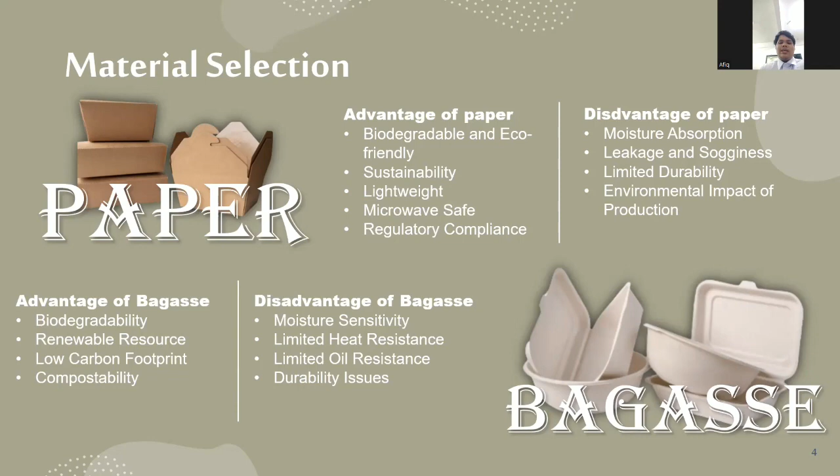Last but not least is durability issue. For sure, the bagasse container may not be as durable as some plastic or metal alternatives, especially in harsh conditions. They might break or deform more easily, potentially leading to spillage and food waste.

Next is about cornstarch. You know, cornstarch is from the corn. Cornstarch has its own advantages too. First thing first, why we choose cornstarch as our material selection is, same like bagasse, cornstarch has its own biodegradability.

Cornstarch containers are biodegradable, making them a more environmentally friendly option compared to traditional plastic containers.

Second, renewable resource. Cornstarch is derived from corn, like I said, which is a renewable resource contributing to sustainability.

Next, cornstarch is non-toxic. Cornstarch is generally considered non-toxic, providing a safer option for food packaging.

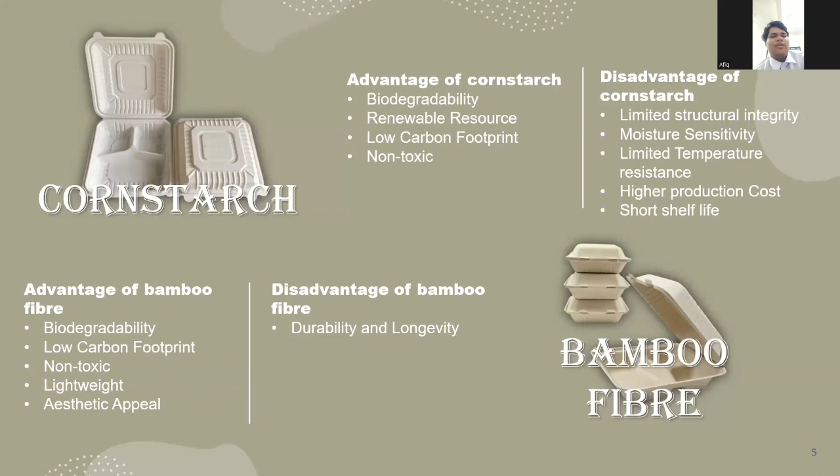Disadvantage of bamboo fiber is durability and longevity. Bamboo fiber does not have higher durability like cornstarch or like paper. Next, last but not least, aluminium.

Aluminium has many advantages in our material selection. First thing first is lightweight, very lightweight, so it can be brought anywhere with low weight. Second is durable and sturdy.

For your information, aluminum is very durable, so you can use it for a certain time when bringing the aluminum container.

Heat conductivity. For sure, many people like to heat their food, right? So they can put it into the microwave. So conductivity of heat means food can easily be heated.

Corrosion resistant, recyclability. This is very very important when you want to select a material. Because if you can recycle, why wouldn't you choose aluminum? Aluminum is very recyclable.

Next is versatile design property. For sure, many companies use aluminum as their food container, so many companies have versatile designs and cost effective production.

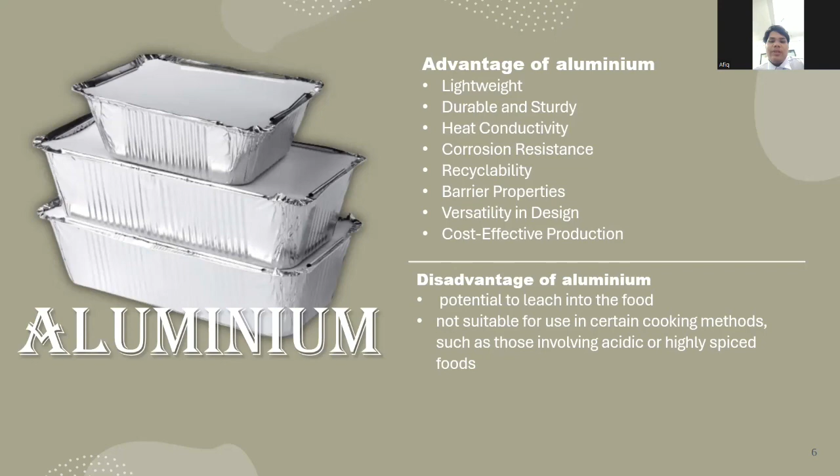Disadvantage of aluminum: potential to leach into the food, not suitable for use in certain cooking methods, such as involving acidic or highly spiced food.

There are five materials for processing and manufacturing. The first one is paper. The primary raw material of paper is wood pulp, which can be sourced from wood fibers, recycled paper, or others. Then it undergoes a pulping process to break down into fibers, which can be done using chemical or mechanical pulping methods.

So what is pulping? Pulping is done using a cylinder machine which converts the material into the right form, like powder and small particles.

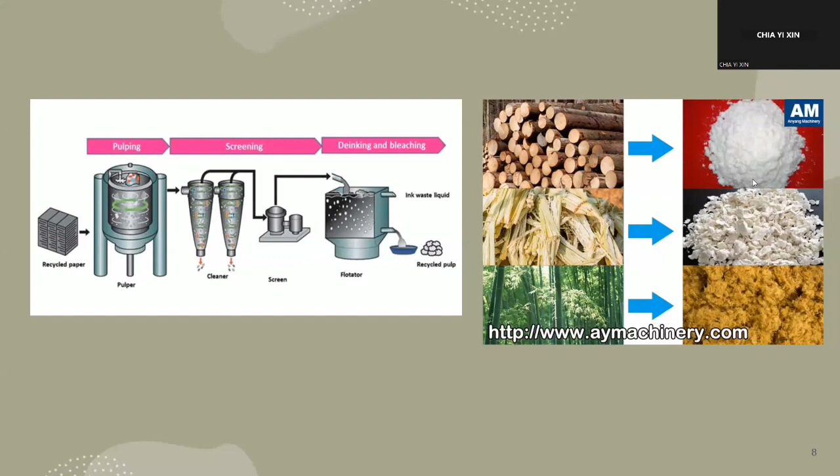The pulp then undergoes a bleaching process, which is optional, to achieve whiteness in the paperboard. The paperboard undergoes formation and drying to remove excess water. The paper is then cut into the desired shape.

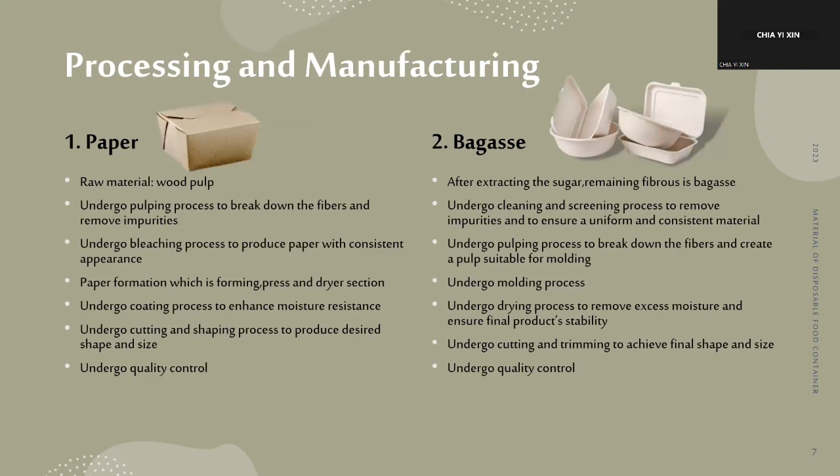The fourth one is bamboo fiber. Bamboo fiber is quite similar to bagasse and paper. It will undergo extraction of bamboo fiber to break down bamboo into individual fibers.

Then it will undergo cleaning and treatment to remove impurities, so the bamboo becomes small particles. Then it becomes pulp and undergoes pulp formation.

Then it will undergo an additive process to enhance water resistance and durability. Next, it undergoes a molding process to form the desired shape. After forming the desired shape, it undergoes a drying process to remove moisture and solidify the structure. Lastly, it also undergoes quality control.

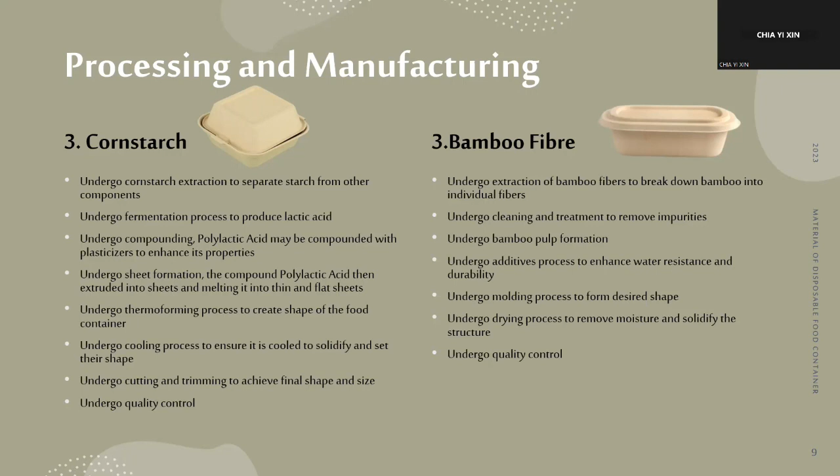So the last one is aluminium. The raw material of aluminium is bauxite. Bauxite is refined into alumina through the Bayer process.

It then undergoes a smelting process, called the Hall-Heroult process, where an electric current is passed through a molten mixture of alumina and cryolite.

After that, it undergoes a casting process, cast into large blocks called ingots. After the ingots are formed, it undergoes a rolling process which turns the ingots into aluminium sheets.

When the aluminium sheet is formed, it undergoes an annealing process, which involves heating and then cooling the metal to enhance its ductility. Then coil formation shapes it into the desired form.

The desired shape undergoes a deep drawing press, pressing the aluminum sheet into a mold. Then it undergoes trimming and piercing to remove excess material. Lastly, we also undergo quality control.

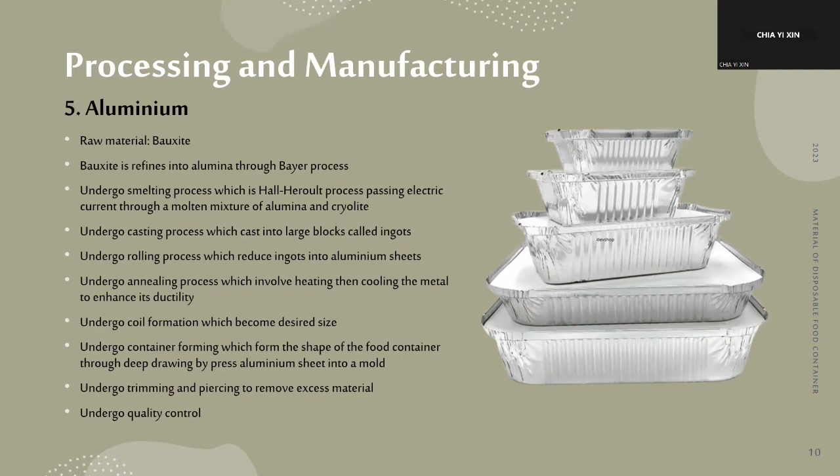Next, for selection of suitable material and processing, we have decided to use aluminium as our material for packaging. Aluminium has good barrier properties to gases, light and odor, and it withstands high temperature.

Some advantages of aluminium for packaging are: firstly, it is lightweight; second, barrier properties; third, aluminium is recyclable, so it can be used again until it cannot be used anymore.

Next, it is cost effective because the aluminium process is cheaper than other materials. Aluminium is also durable for food packaging.

This is because the hardness of the aluminium is suitable for the weight used in food packaging. Lastly, the material is temperature resistant. Whether the food is at high or low temperature, it is suitable for use in the packaging.

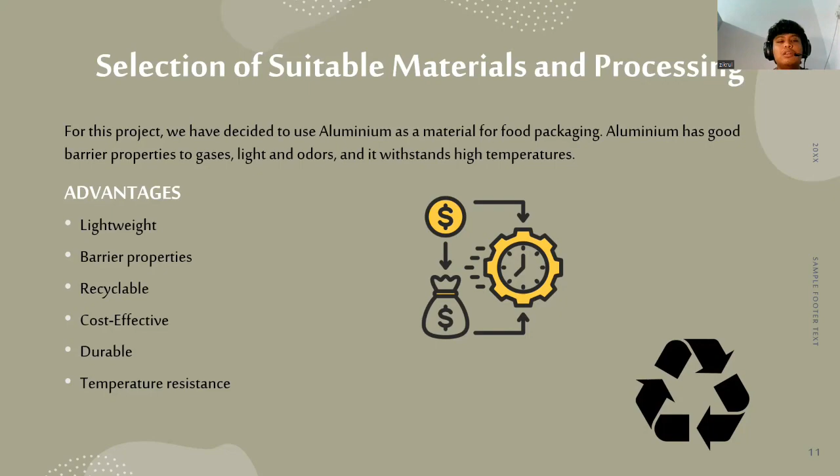So, suitable material and processing. The processing of the food packaging: first, the electrolytic reduction of alumina, which produces the aluminium metal.

Next, the forming of aluminium into ingots or semi-finished products. After that, reducing thickness through rolling to create an aluminium sheet to form food packaging.

Further reducing thickness at room temperature, it then goes through heating and cooling to relieve stress and improve flexibility of the food packaging.

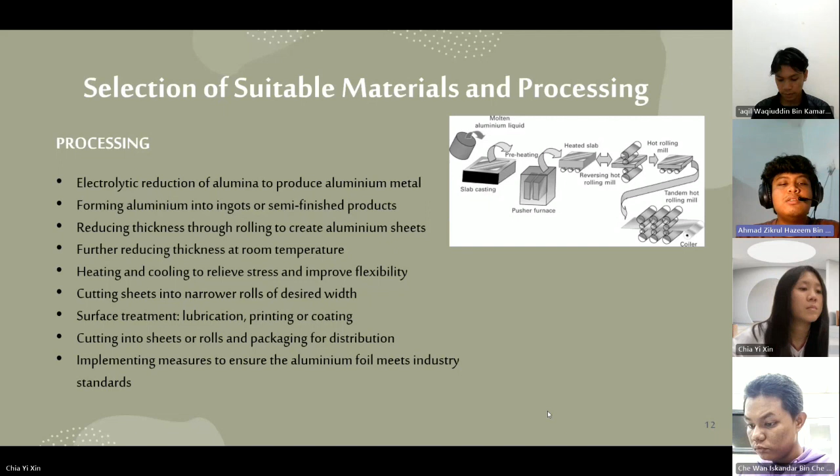After that, the processing of cutting sheets of aluminium into a narrow roll of the desired width. The surface treatment of the food packaging forms lubrication, printing, or coating on the packaging.

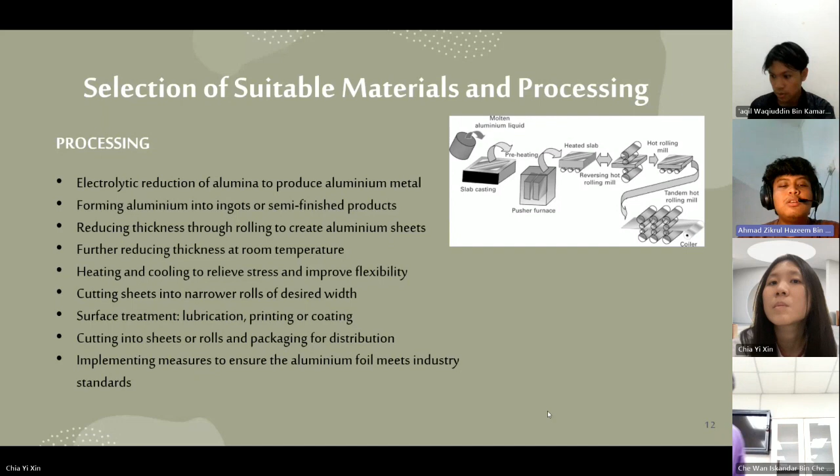Last but not least, cutting into sheet or roll and packaging for distribution, and implementing measurement to ensure the aluminium foil meets industry standard.

So as a summary, we took aluminum as our material because it is lightweight, recyclable, and durable compared to all of the materials.

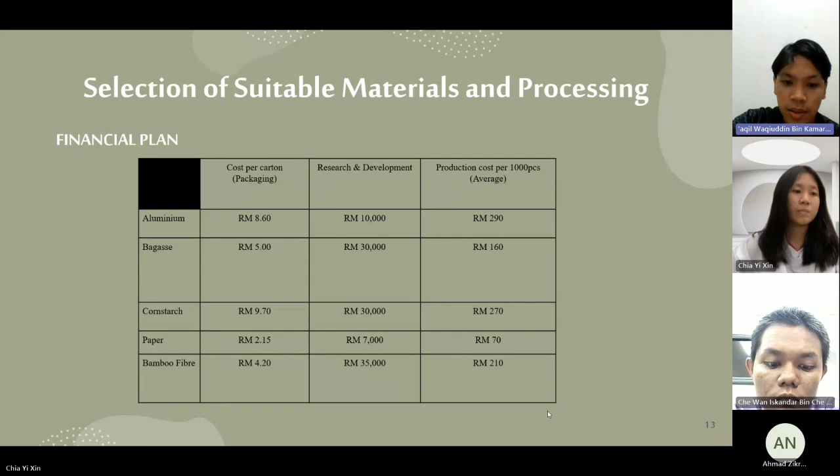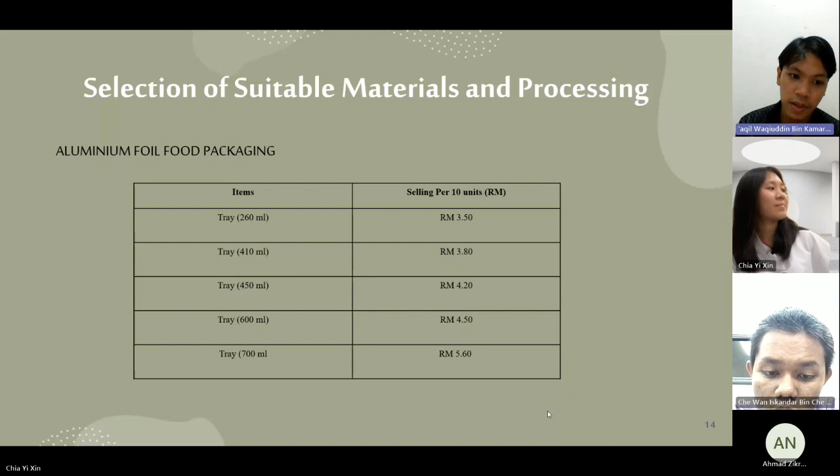And the 700 milliliter tray, RM5.60.

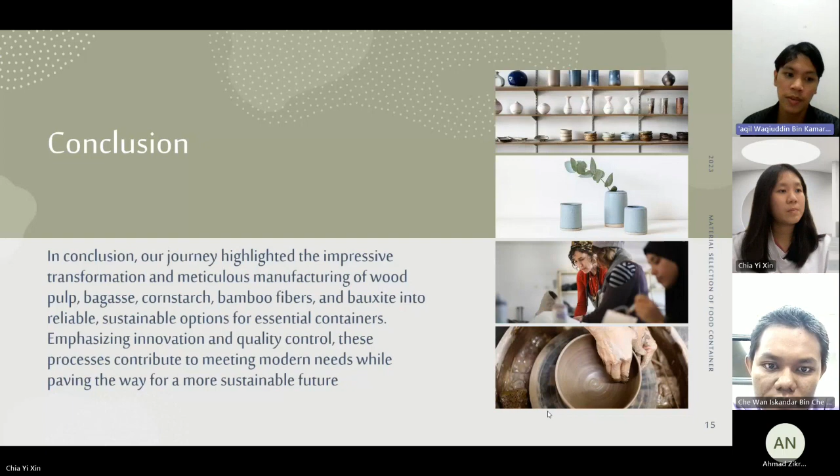So we move to conclusion. In conclusion, our journey highlighted the impressive transformation and meticulous manufacturing of wood pulp, bagasse, cornstarch, bamboo fibers, and bauxite into reliable, sustainable options for essential containers, emphasizing innovation and quality control. These processes contribute to meeting modern needs while paving the way for a more sustainable future. So that's all.